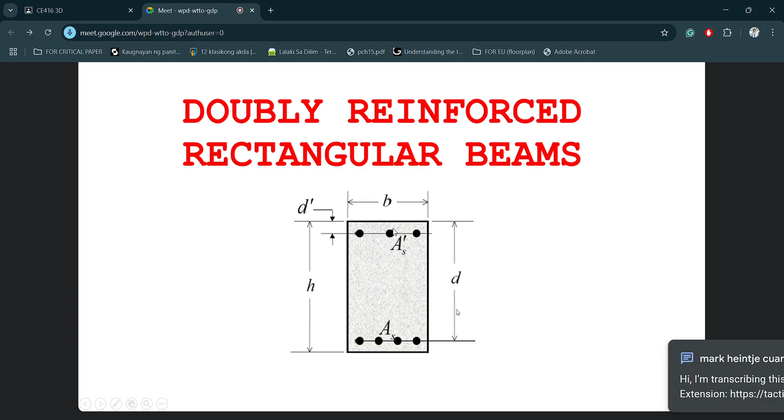But before that, I would like to ask a simple recall. The question is, when can we say that the beam is singly reinforced or doubly reinforced? Anyone from the group? Can I hear?

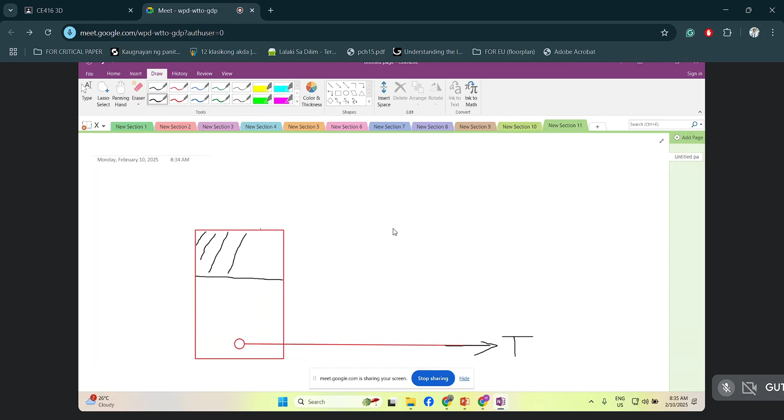at the bottom or at the tensile side, we will have here the tensile force T, meaning tensile force provided by the steel reinforcement. And if you still remember, we are going to assume here the depth of compression block, which is denoted by a symbol a. This is actually the compression side of the beam.

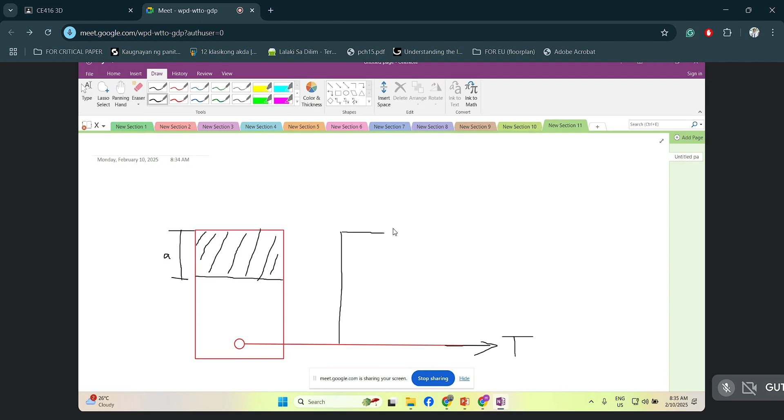And then if we are going to draw here the equivalent force of our compression side, this will have an equivalent uniform load wherein it will be acting as a compression. So it will have a resultant of C, wherein if we sum forces along X, we say C is simply equal to T.

Now, if the force produced by C, which if you still recall is 0.85 f'c ab, is huge enough to create a moment with regards to this moment arm, which is simply equal to d minus a over 2, then it will be enough. So the force times this moment arm will have a resisting moment to resist the actual load. In other words, if this force is huge enough, then we can resist this particular load.

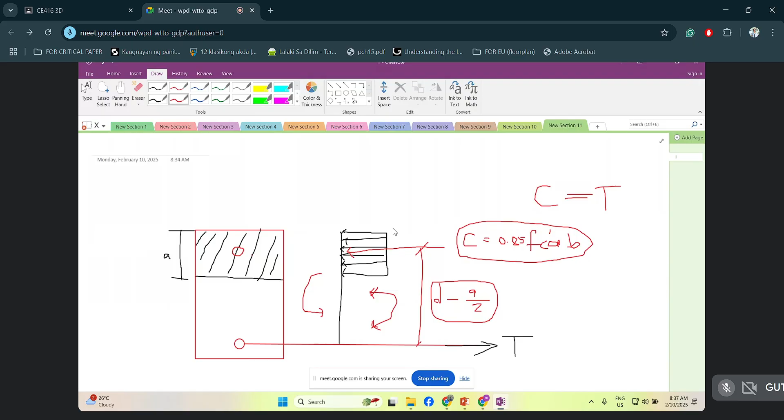But if not, then that's the time we are going to consider adding additional reinforcement here, which would serve as compression reinforcement. So we will have additional force here so that the moment will be larger. That is the purpose. So we are then going to call it a doubly reinforced beam. In other words, if singly reinforced is not enough, that's the time we add additional compression reinforcement, so it becomes doubly reinforced.

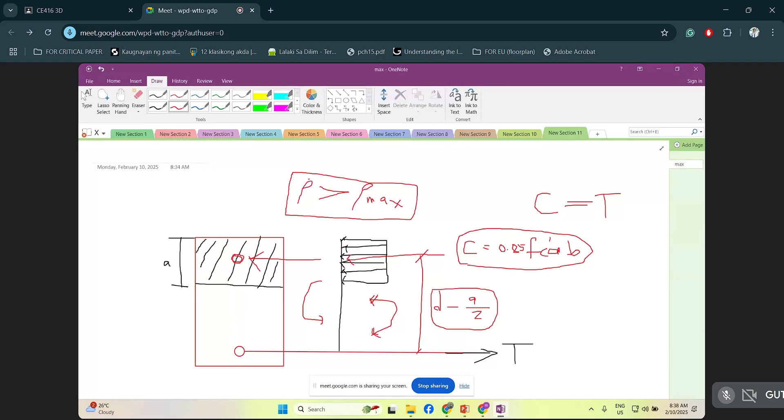So if singly reinforced is not enough, that means our actual reinforcement will be greater than our maximum reinforcement. Our singly reinforced analysis cannot handle it. So our steel ratio increases because we are adding reinforcement. So when the actual steel ratio is greater than the maximum steel ratio, then that's the time we consider designing it as a doubly reinforced beam.

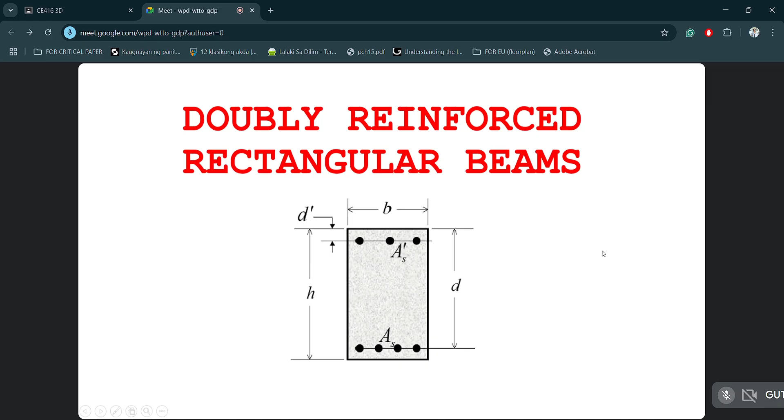Alright, I hope that is clear. I have here a presentation, and take note, this is already uploaded in our Google Classroom. Kindly go over it. Our discussion is focused mainly on doubly reinforced rectangular beams, and along the way we will have sample problems on analysis and design examples for doubly reinforced rectangular beams. So to begin with, we have here an explanation.

If a beam cross section is limited because of architectural requirements, mostly what is affected is the overall depth of our beam. Sometimes the height requirement is limited; the architect will say we have a requirement in terms of floor to ceiling height. So you cannot make your beam very deep. And with other considerations, it may happen that the concrete cannot develop the compression force necessary to resist the actual moment load.

So as I explained earlier, since the depth of the beam is short, the tendency is our moment arm becomes smaller to develop our moment capacity. If that moment arm is minimized, our moment capacity becomes smaller, and that's the time we are going to add additional compression bars along the compression side.

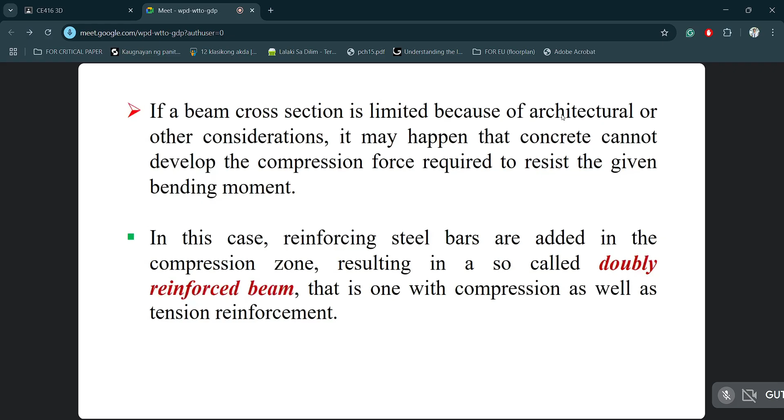Excuse me for a while, I need to answer the call.